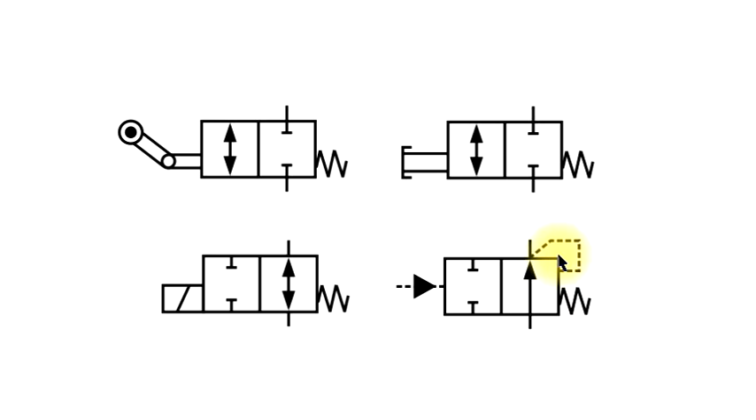Now this one's interesting because you'll see it's got a drain line. So on all spool valves you need to vent the ends of the spool, and that will be done internally, generally to the tank line, but on two-way valves you don't know that one of these is going to be the tank line. In this case it probably has to be. You can only have flow in one direction because you need this to be vented in the right way.

Keep an eye on this. Not all designers put this information in because it's not needed, but it is critical, and when you're selecting valves you do need to know this, particularly these two-way, two-position valves. So that's quite key.

So let's look at this next valve, and hopefully you've seen that this now has three ways. It's good to put the port identification on. So we've got a pressure port, a tank port, and an actuator port.

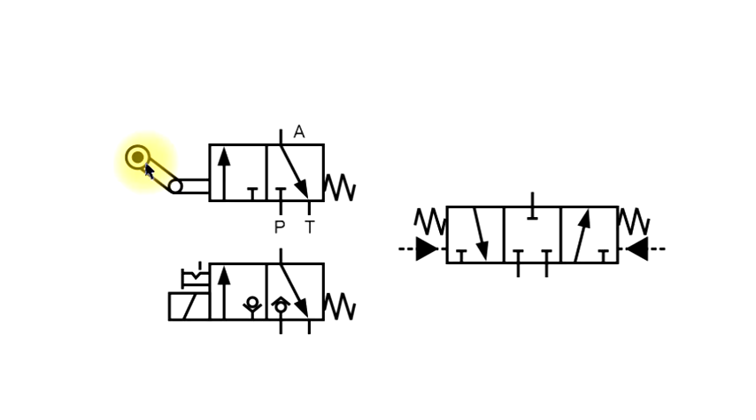It's venting the actuator to the tank line in the unactivated condition, and then when you activate it, it switches the pressure to the actuator line. So this is a three-way, still two positions.

This little thing here, we've got a detent. So as you activate the solenoid, it is held in position.

But the key thing on this valve actually is here we'll see these little poppets. So whereas directional valves are generally spools, they're not always spool valves, and it will be shown like this if it's a poppet valve, so there will be reduced leakage from this valve, because with spool valves there's always a clearance, so there always will be some leakage between the different ports.

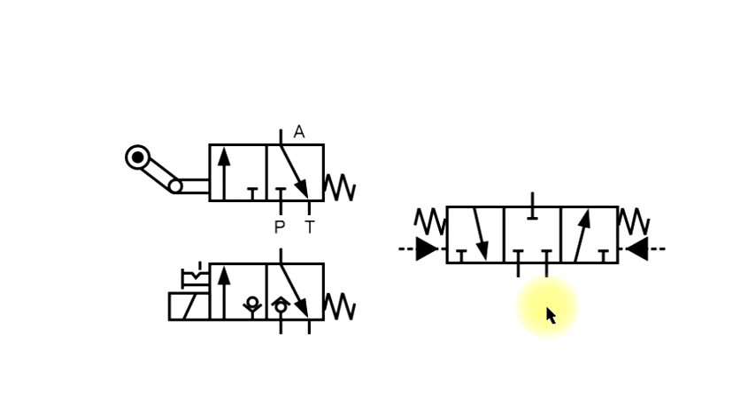And on this one we've now still got three ways, but we've got three positions. So we've got our hydraulic pilot switching from one side or the other, and you can see by the arrows that as it's switched one way, it connects the P line to the actuator line, and on the other way it vents the actuator to the tank return line. So that's our three-way, three-position valve.

So let's look at this one. Hopefully now we can all work out straight away what these symbols represent. So we've now got a four-way valve. We've got an A and a B line, and we've still got our two positions manually switched.

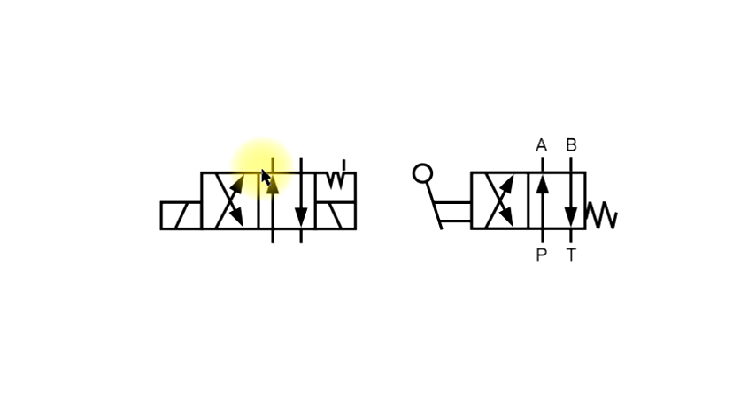On this one, note here there's no springs. So instead of the springs we've got a double detent here. The solenoid would switch the valve, and it would then be locked in position by the detent, so you can de-energize the valve and save energy. So this is a double detented valve, but again a four-way, two-position valve.

And almost as complicated as it gets. These are our traditional CETOP valves, industrial valves.

So we've got four ways and three positions. The switch operates the same way all the time - solenoid operated, pilot operated - again we've got all our standard symbols of operation, but this one actually we've now got a hydraulic pilot symbol here. So we've got external activation.

This is a two-stage valve. That can be internal piloting, so that might not be shown, but this is a two-stage valve. We've got our solenoid on the top section, which will be a small directional valve, and then to achieve the high flows we need a large valve. So to get that to switch we need hydraulic piloting of that and operation and movement of the spool. This one symbol indicates that we've got a two-stage valve, so it's a bit more complicated in reality.

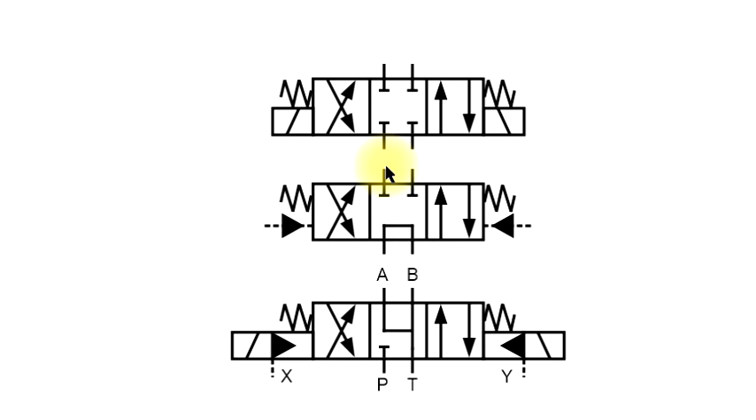But another key thing that's interesting to notice here is the center conditions. So this is what's changing on these valves. The actual operating is the same, but the center condition changes on each valve. This depends, and will be set by the designer, but depends on the type of pump you've got. If you've got a fixed displacement pump, you need it potentially to be unloaded in the middle condition so that the flow just comes straight through and it doesn't hold full pressure on the pump or damage it. So it depends on the circuit, but all of these are very valid.

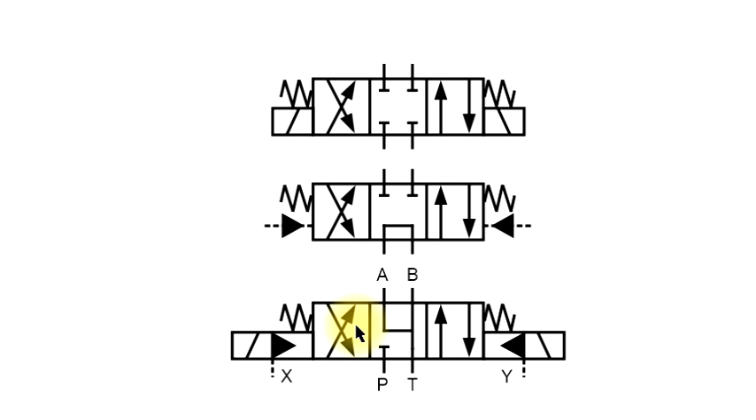This one is very common - we're now venting the A and B lines to tank, so we're clearing these signals. It's not good if you've got a valve like this, you don't really know what pressures are going to be occurring here, it might be difficult to predict what's going to occur there. So by venting it to tank, we release the loads off the cylinders. We don't allow the feed through and the leakage through from the pressure to upset the pressures on these lines, so nice and clean. But an important point to be aware of.

So this is our challenge. What do you think these symbols represent? Stop the video and think about it for a few minutes. Start again when you've worked out what this means.

So, welcome back. Hopefully this is a bit of a trick question really, because it looks as though it's a four-way 5-position valve, but that wouldn't make sense. These are actually the crossover conditions. So as the valve switches from center condition to either A or B activated, the crossover of the lands must form some sort of either closed or open crossover condition. And this is quite critical actually in some cases.

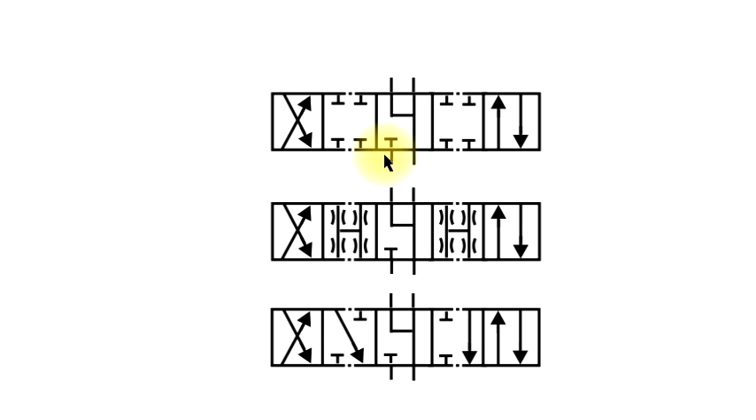If you've got a fixed displacement pump and you switch it from being open - it's not open in that case - but if it switches from being open to being closed, then you would get an instant pressure spike on that pump, which would damage it. Particularly a gear pump would damage it very quickly. So it is key to know these conditions.

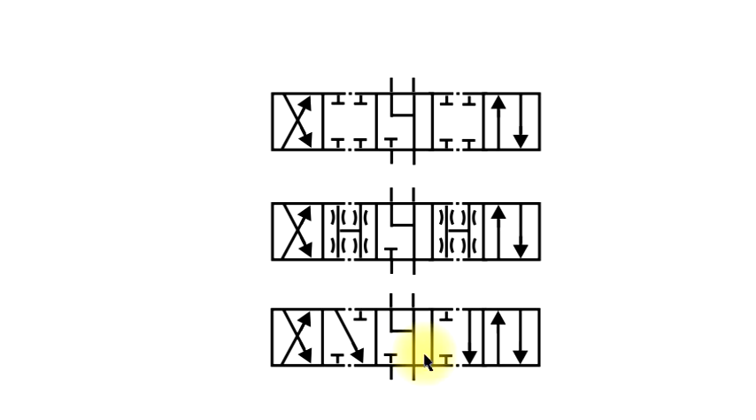Only the designer really needs to worry about it. Once the circuit's fixed, it's not so much of a problem, so they don't get shown on the circuits typically, but they are important to know, and they'll be on the data sheets for the valves, and it's good to recognize what it means as a symbol. So well done if you got that.

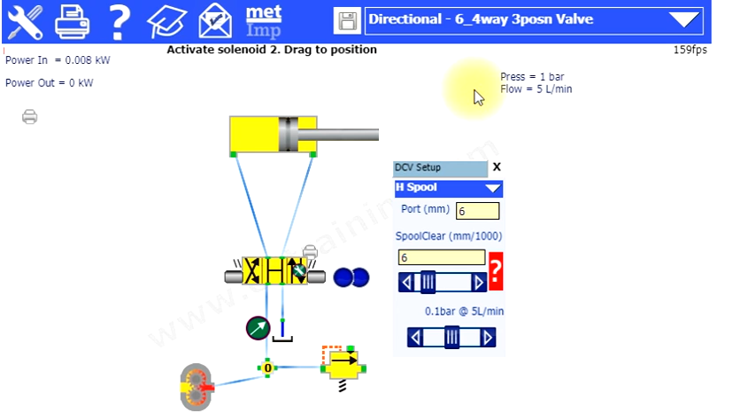Now let's go over to our simulation program again and experiment with our valves by switching them and seeing what happens. Remember, you can click on here and change your center conditions within the valve to see the effect of the different center conditions. You can blow up this gear pump quite happily, we don't mind that. So again, follow the experiments and experiment yourself to make sure you fully understand the different options that are available - there are lots from our drop down list. So have fun.